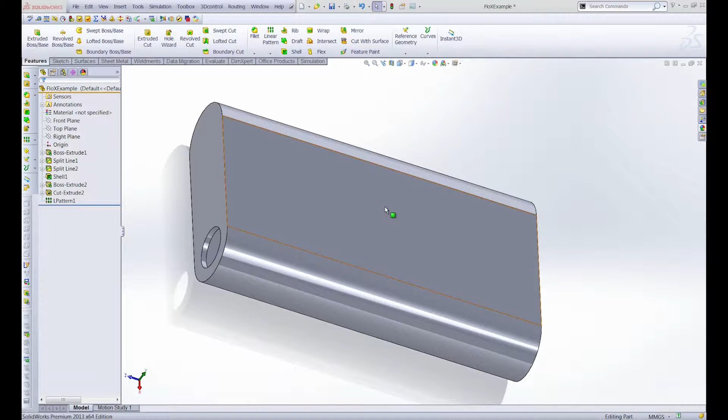We have this shelled structure with a hole on either side. Let's make this transparent by going under the appearance settings and making it a little bit lighter. Now you can see inside of our part.

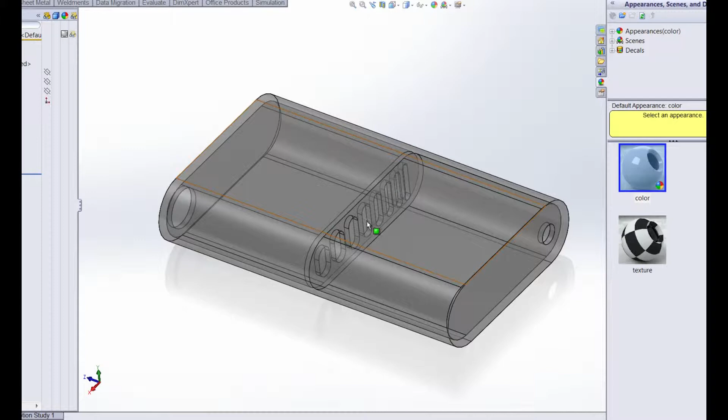We have the inlet, the small hole, where our gas or liquid enters, makes its way through this grate right in the center, and eventually exits through the outlet here.

Before we run our flow analysis, we need to cap off these holes with lids. SolidWorks needs a surface to register the pressure flowing through the hole, so by putting lids on these holes and not merging the results, we'll have something for that pressure to push against to get a good gauge.

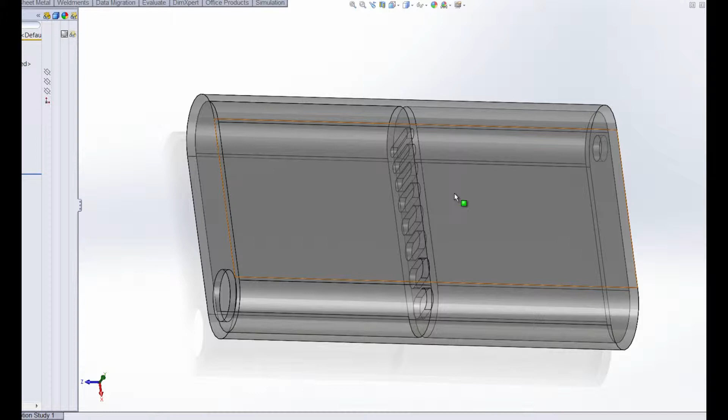Let's find those sketches. In split line 1 and 2, you can see we have either sketch. Sketch 2 is the outlet hole, and sketch 3 is the inlet hole here.

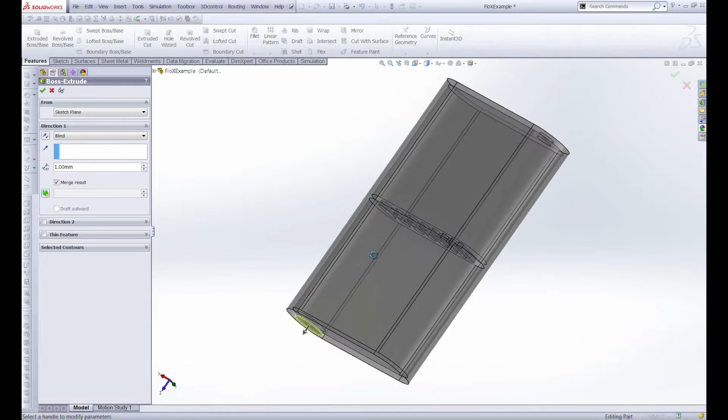Let's extrude out this sketch, making it 1 millimeter and reversing it so it goes inside. There we go - the thickness here doesn't really matter. This part is shelled out to be 4 millimeters thick, so our 1 millimeter thick lid isn't flush with the inside surface, but that's okay. Let's accept that.

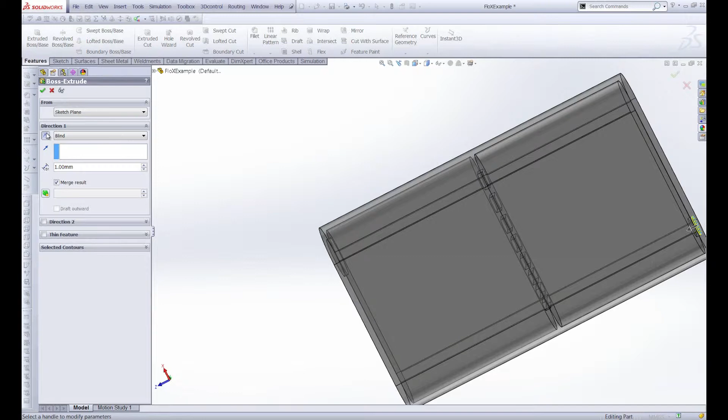Now let's get sketch 3 with an extruded boss and make sure it's going the right way. We'll reverse the direction so it's facing inside and click OK. Now we have our lids.

Now we're ready to run the FloXpress analysis. We go under Tools, and you can see right here, FloXpress.

The first thing you see is a large message. It tells you a bit about the FloXpress tool and that you need to have lids in order for it to work. It also gives a disclaimer saying not to rely solely on the FloXpress results, which is basically just to cover their tracks, because honestly this isn't a very detailed analysis.

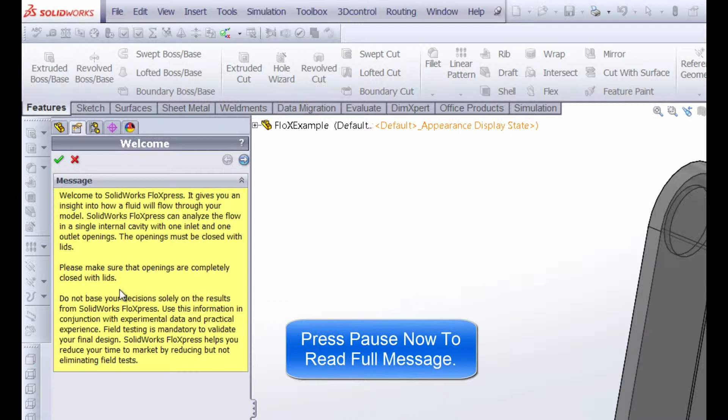This is just a way to get a really good top-level analysis. If you see that certain things aren't quite making sense or working out the way you anticipated, you can go ahead and make design changes based on that top-level analysis. However, we have lids, everything's good to go, so let's click Next.

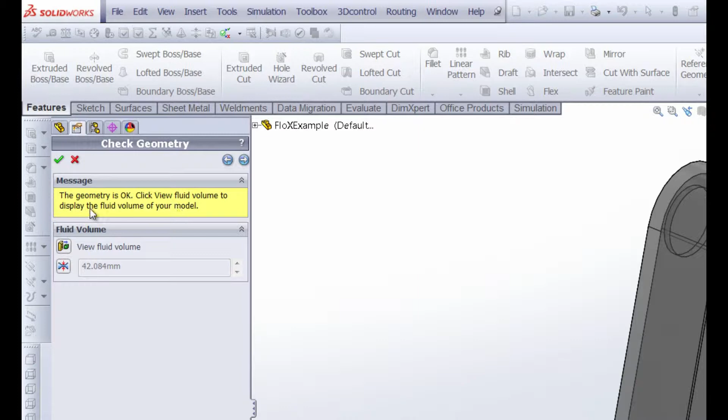Here you can see the geometry is okay. Click View Fluid Volume to display the fluid volume on your model, so let's go ahead and do that.

Everything in blue here is the volume inside of that shelled part. You can see this little bridge here, that's where that vent is, so those open spaces will be part of the volume of this part. We can also see that the volume is 42.084 millimeters.

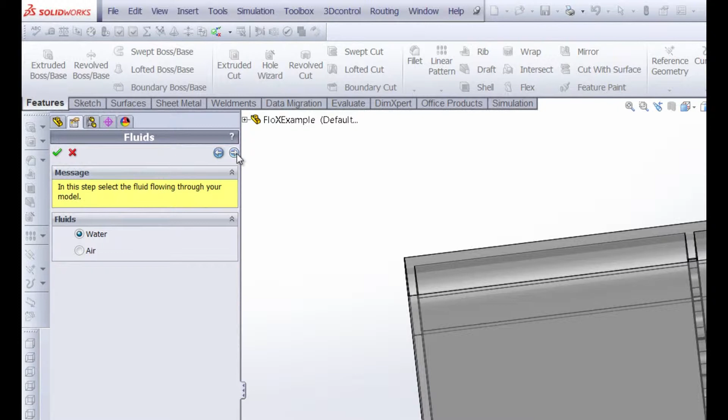This is here mostly for your reference, so let's just click Next. One of the limitations of the FloXpress tool is that we're limited to either water or air. If we do change to air, you can see changing this parameter requires recalculation from the beginning. I don't want to change that, so we'll leave it at water and click Next.

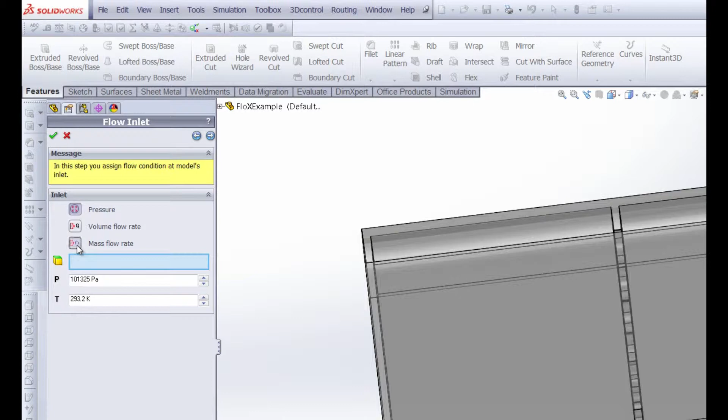Our message says in this step, assign flow condition to your model's inlet. What that's asking is, do you want the flow condition based on pressure, volume flow rate, or mass flow rate? I'm going to select mass flow rate and click Yes. Then I'll choose the back face of the lid we created on the inlet. I'll right click, select Other, and I'm fairly sure it's this face, but let's zoom in and take a look. Let's bump this mass up, how about just to 1 kilogram per second?

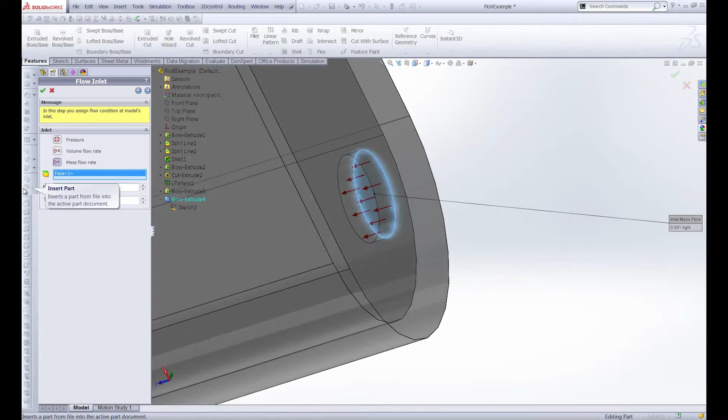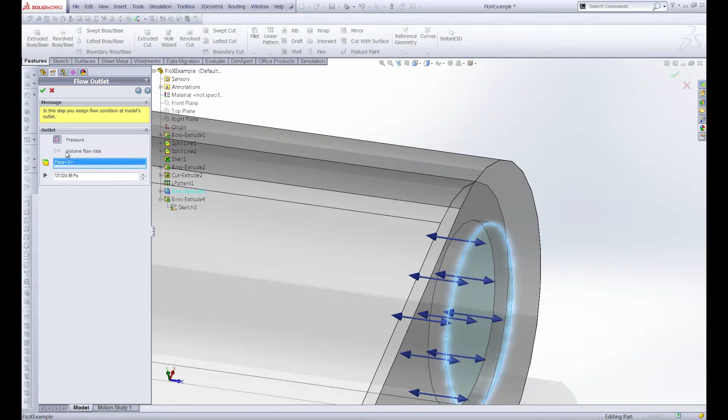Click Next, and now we need to find the outlet. In this step, assign flow condition at the model's outlet is what the message says. So let's find that face there. That looks good. For this flow condition, we want pressure, and we're just going to leave it at atmospheric pressure. We'll click Next, and then we can solve it.

Now SolidWorks will run the analysis. Instead of making you watch the green bar go painfully across the screen, I'll cut to the end. My system is pretty fast, and it still took a little under a minute just to generate these results, so you can expect a little bit of time.

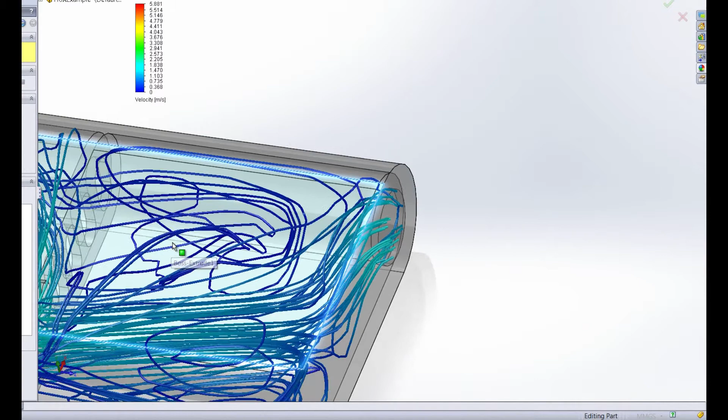When we take a look at our part, you can see we have all kinds of information here having to do with the flow of water coming from the inlet, and you can see most of it swirls around and then goes through the vent here and out the outlet. The color of each of these pipes corresponds to the velocity of the water coming through the hole. So you can see it comes in hot through the inlet and slows down around the curve, and then it speeds back up when it goes back into the current.

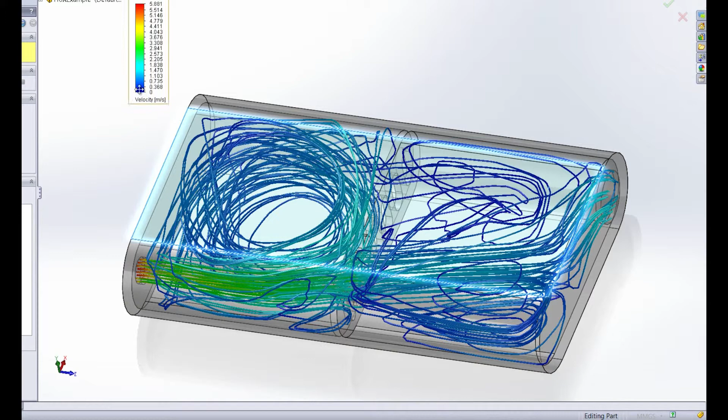All of this business over here is really slow, that's almost at 0, so that's showing some stagnation there. And then it speeds up as it goes out the outlet.

If you'd like to see an animation of the trajectories, you can always hit play, and that will generate for you. There you go. We can also change that to balls if you'd like a little more molecular feel. When we run that animation, you can see it's flowing just the same.

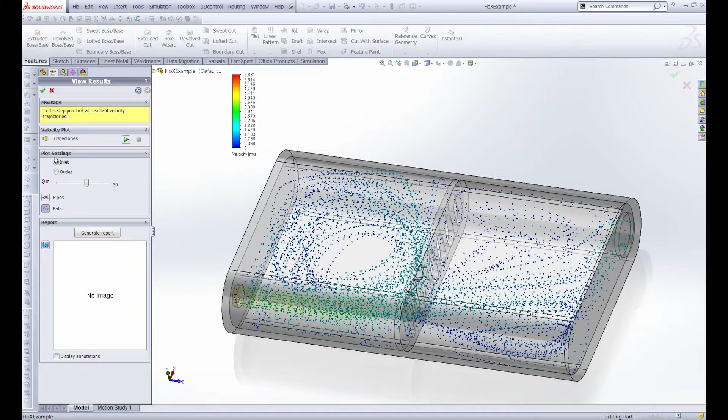We can plot it from the inlet, which it is right now, or the outlet. We can play with this slider here to manipulate the number of trajectories. So let's change this back to pipes, and let's get a nice full-on view of this and take a picture. Right here you see a snap image. We can snap that image, and that image will show up in the report.

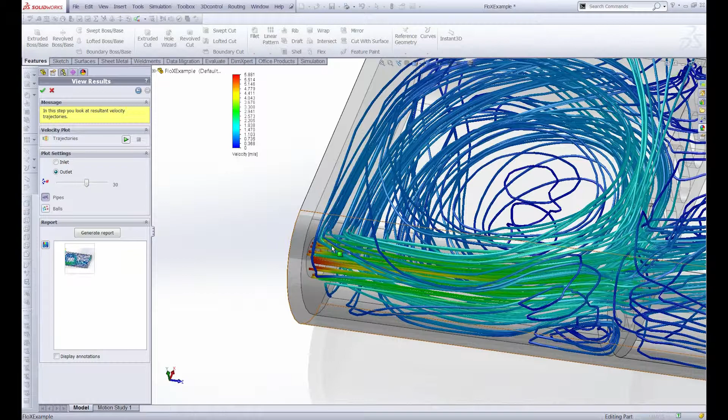But let's take a few. Let's take one right at the inlet, and then we'll take one at the outlet as well.

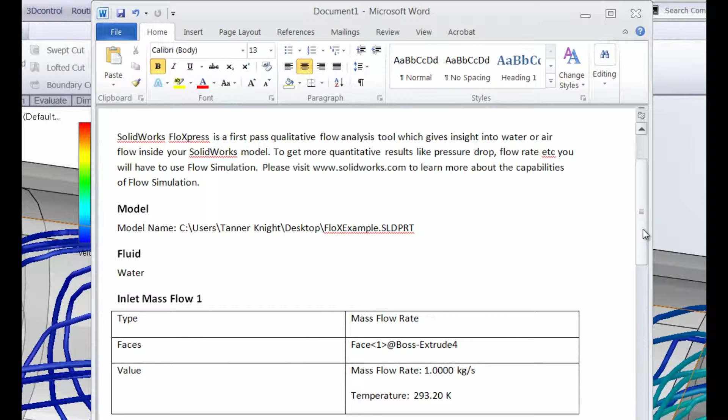When we generate that report, SolidWorks will generate a Word document with the report and these photos as well. So if we go down and pull that up, you can see we have document number 1 with the SolidWorks FloXpress report. This first paragraph says that FloXpress is not the be-all, end-all analysis tool, and it shows you how to upgrade. However, the information for this report all shows up right here.

We can scroll down, and we get those pictures stacked up so we can see everything that we need to see. So once again, the FloXpress tool does have its limits. However, it's a really great quick analysis tool that allows you to set up a really quick flow analysis that'll give you an idea of any design changes you need to make in order to achieve your original intent.